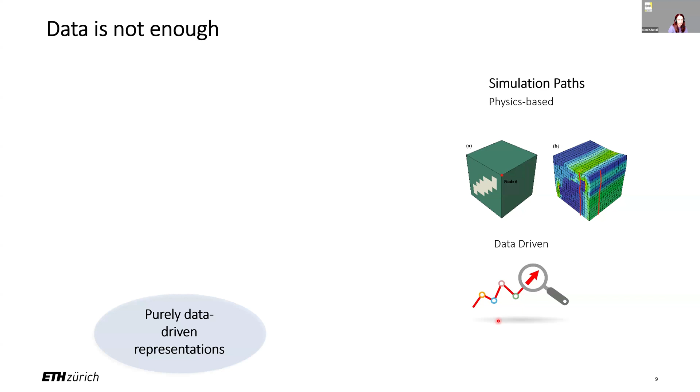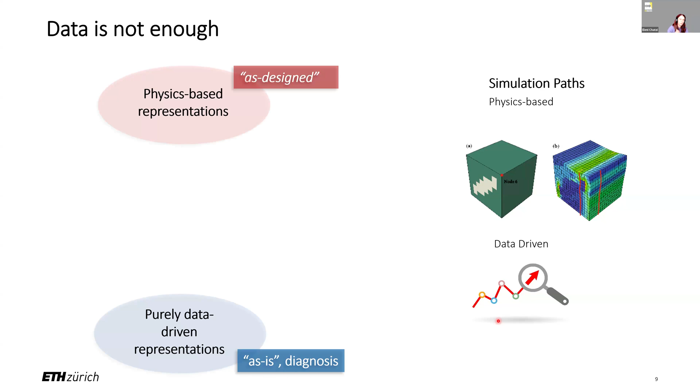We know that purely data-driven representations can give us insights. Actually, oftentimes they excel at tasks that have to do with diagnostics, for example. But the moment you want to go a step further, you have to bring physics and overall understanding into the loop. And this is not new for engineers. We have been using physics for years, but usually we use it in what we call the as-designed system. You use it to design the system and predict and anticipate its behavior, not necessarily connecting this with data.

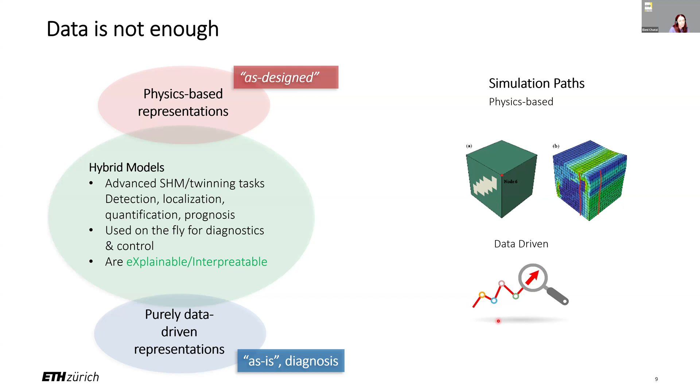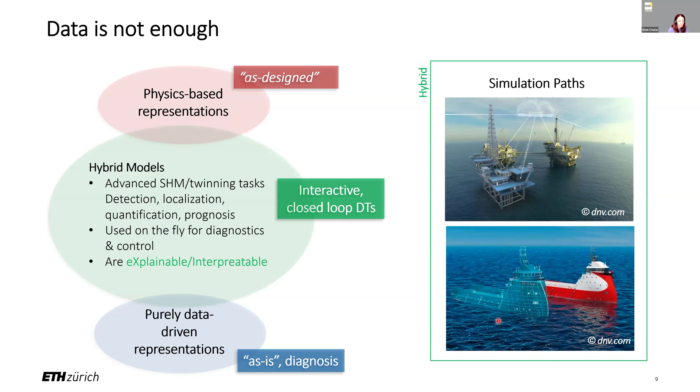And what we would like to achieve here within the context I am describing is the hybrid functionality, the situation where physics and data come together in a hybrid construct, which is, if possible, able to compute very fast on the fly as data is attained, creating interactive closed loop digital twin representations that can really reflect the system as is operating and therefore advise us on how to best react next in a short or long-term horizon.

If you would like to express this problem in the context that we're facing, then we have to admit that it is actually a quite complex problem, especially if we're thinking about real-time digital twinning, which is really the main goal for our activities here at the chair. Since we have systems that are complex in nature, in that they're actually characterized by nonlinear dynamics, they are responding to loads that could be environments that are varying, that are not easy to monitor. They have acting loads such as waves, wind, or traffic that is distributed in nature, not easy to track in a very accurate manner.

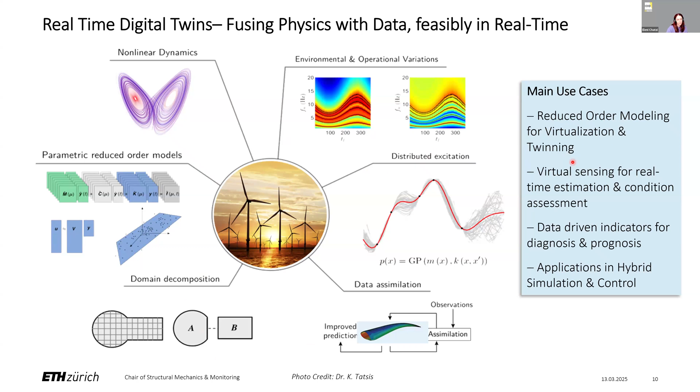And we're gathering data, but this data is sparse, and it is in select locations that we have the ability to instrument. And at the same time, we have to balance this data with engineering models that are usually overly complex and not easy to reduce in terms of computation. So this is what we will try to do here. And I'll try to show you examples that try to achieve this for the tasks of digital twinning and reduced order modeling, data-driven diagnostics and prognosis, but even tasks that really require very fast reactions, such as, for example, control and eventually decision support.

Now, maybe before I proceed, it's good to say that together with some of my colleagues in a recent paper, which you now find available in the ASCE-ASME Journal of Risk and Uncertainty in Engineering Systems, you will find that we try to actually frame these various uncertainties that are underlying the behavior of these systems and try to break it down to the usual construct of how we describe these dynamic systems, because the systems we deal with are usually dynamic in nature. This is where we think most rich information can come from.

So here we try to break the uncertainty into the parts of the problem, from the input uncertainty to the model uncertainty that could be about modeling error, but also parameter uncertainty when some specific prior knowledge of the model is at hand.

Confounding influences or aging processes that are actually acting onto the system, making it harder for us to model its behavior, but also uncertainties that have to do with the measured output, which can never be precisely measured. And you will see different methods that we actually describe for tackling these.

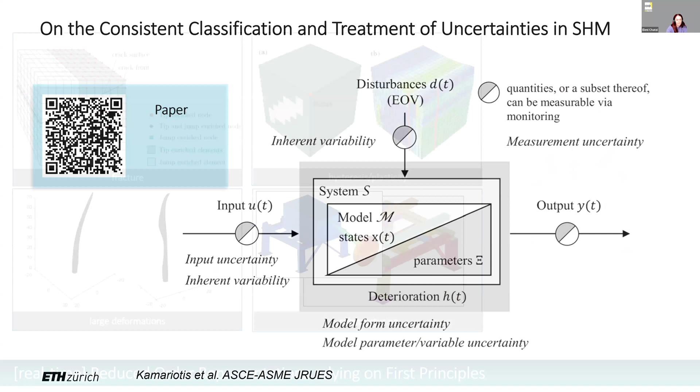Now, given this kind of problem statement, which is quite complex, I want to come back to the actual utilization of the physics. And I remind you that the goal is to use engineering models, but that actually the classical models that we as engineers tend to use are not necessarily the right models, because their complexity often makes them inadequate for the fusion with data. I give you examples of such models because, of course, as a chair and a group, we teach also these methods for fundamental engineering problems.

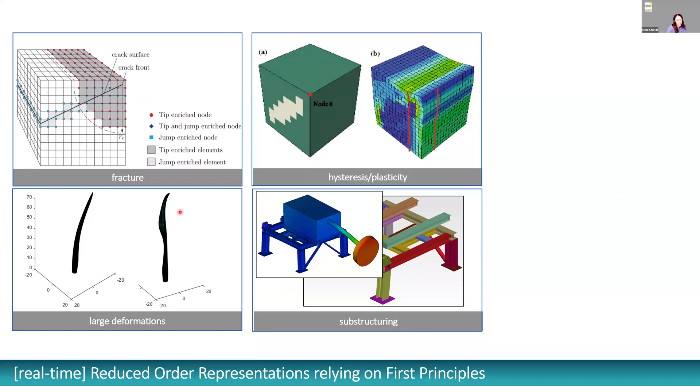But I remind you that actually what we would like to have in the end is something that can compute in fragments of a second for the types of problems that we're dealing with. And I'll show you some examples also later on, but you wish to have simulations of complex, maybe cracked and defect geometries that are dynamic in nature and really, really fast to compute.

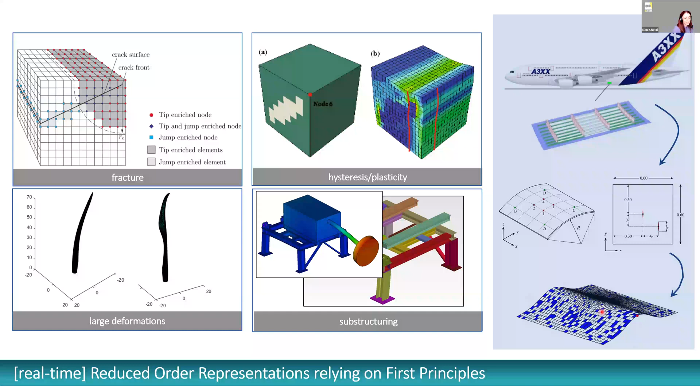There exist today different ways, of course, of doing this. All of you are familiar, I think, with reduced order modeling strategies, or what we typically call surrogates or metamodels. Now, in our context, the most useful of these surrogates are those who can always have or refurbish a connection to the original full order model. And I show you what I mean here with an example by the work of Tom Simpson.

Here I'm showing you the example of a possibly detailed finite element model of a large number of degrees of freedom, which we use for dynamic analysis. And the logic which we can follow for reduction is the following: not to use the original set of degrees of freedom, but to try to reduce these by using appropriate latent space representations. Sometimes for linear systems, for example, you would know this as the modal representation of the system. Now, because we're discussing nonlinear systems, we have to use alternate methods to derive these features.

And here we use a variational autoencoder, which allows us to extract a low-dimensional space where we implement the acting loads to the system. And this is where we're actually implementing also the integration of the system in time. This can be done with your favorite integrator. In this case, we use also a machine learning algorithm to do the integration, an LSTM in this particular case.

Now, what is important in this kind of surrogate framework is that at any point in time, and even though this is a nonlinear system, we can go back to the original space using the decoder function of our autoencoder construct. And this allows us to recover the response of the system in the original full order degrees of freedom. The reason why for us this is important is because the quantities that we measure, whether these are strains or displacements, velocities or accelerations, are in the original degrees of freedom and not in this reduced space. You can imagine it as a modal space, which doesn't necessarily have a physics connotation. So we need this kind of a framework to be able to proceed.

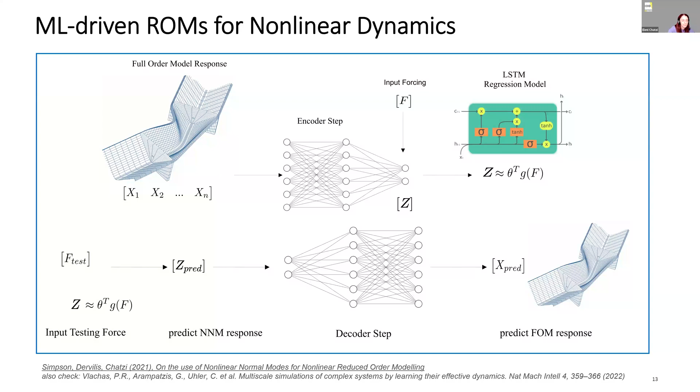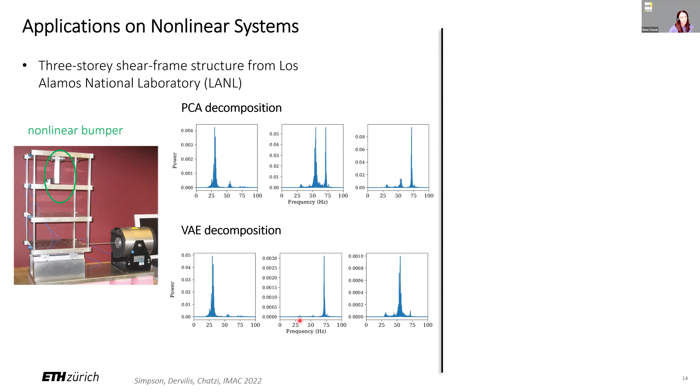We have actually corroborated this framework in the by now quite well-known benchmark of the nonlinear frame of the Los Alamos National Laboratory. It is a frame featuring a bumper, a nonlinear element. And here it is quite hard to show that you can get a good feature extraction, meaning a reduced space where the components are somehow independent, which is the goal, to produce what we would call an approximation of nonlinear normal modes. And we show that with the variational autoencoder, it is in fact possible to succeed in such monochromatic, almost monochromatic and thus individual components.

More importantly for us, we took this developed reduced order model and we implemented it on an actual engineering problem offered to us by our collaborators in Siemens Gamesa, a monopile wind turbine structure, which is actually based on a soil foundation, which has a nonlinear behavior, characterized by the so-called PY curves.

And this kind of computational model is actually very difficult to compute for transient and steady state effects for nonlinear analysis that are of dynamic nature. So we try to implement this kind of approach to give them a surrogate that can produce the same result in all degrees of freedom of the model, therefore including the degrees of freedom of interest, but at fractions of the computational time, in fact, in real time of computation.

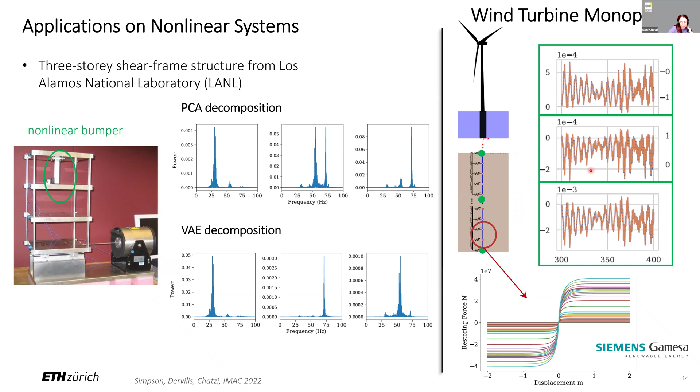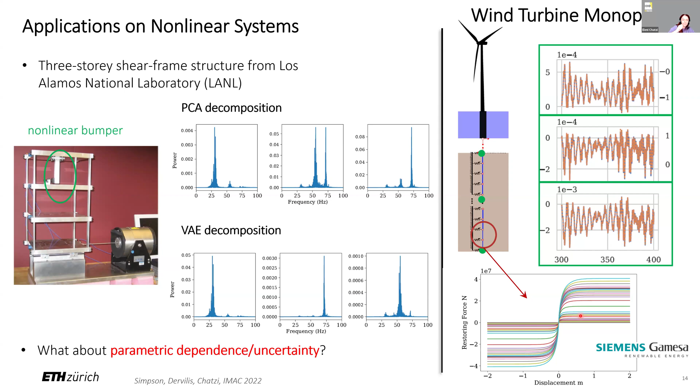Now, in what I've shown you, I make the point of reduction, but I don't discuss something quite important, which is what happens when you want to produce these surrogate models, not only for a single instance of the system, but for various different parameters of the system. For example, what if I had different soil conditions? Can I produce a reduced order model that is thoroughly comprehensive and can also be conditioned on these different various parameters? And the answer is yes, there exist ways to do that.

And one of the favorite ways in which we try to implement this is by producing what are called projection-based reduced order models. I show you here a way in which this is achieved by using a benchmark structure from civil engineering. This is, let's say, a popular favorite, a shear frame structure, which is excited by earthquake. It is also a nonlinear structure because every joint here on the shear frame is a hysteretic joint, meaning it has nonlinear behavior post-yield. It is characterized by a Bouc-Wen hysteretic model, which is a convenient model for us to deploy for finite element approximations.

And it is excited by ground motion, which can be characterized in terms of parameters, both in the frequency and the time domain. So we can actually break down an earthquake excitation into its parameters, which will be defining our problem. And we also have a characterization of the system by a set of parameters that correspond to its linear behavior, for example, the Young's modulus, or its nonlinear behavior, for example, the Bouc-Wen model characteristics.

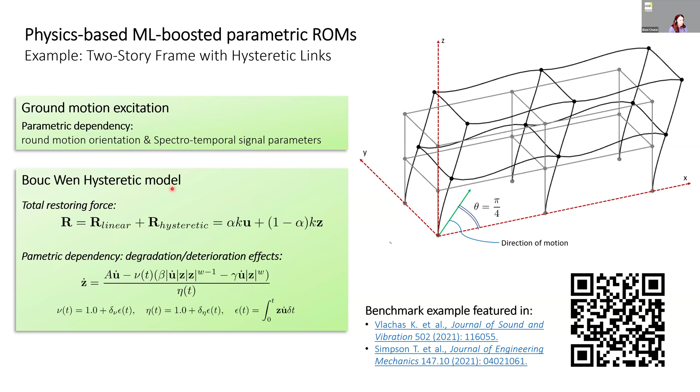So here's the question: how do I produce a fast computing surrogate, a reduced order model that respects the physics, can reproduce the response densely at every degree of freedom, and condition it on these parameters? The way to do it is to use a projection-based approach where your original equations of the problem can actually be transformed into similar nonlinear finite element equations, but now using a new variable, which is of much lesser dimension, of a dimension r, that is much lower than the original n degrees of freedom.

The way this can be achieved is through a transformation of the original variable by using a projection matrix to a reduced space. And this projection matrix is something that we can extract from running multiple simulations of the original full order model. So we take the time histories, we implement essentially a singular value decomposition conditioned on different parameters, and we're able to extract these projection bases.

Now, traditionally, for this extraction to be efficient, you should be repeating it for different types of parameters of the input or of the characteristics of the structure. You could produce such a global basis, but it wouldn't work so efficiently. And there is a problem here in this construct because it doesn't really give us a functional dependence between parameters and these very important bases. And we actually corrected this.

We have introduced with Kostas Vlachas a procedure to reproduce these kinds of reduction bases just by defining the set of the parameters that are governing the problem, and we are able to do it in a stochastic way, which is achieved through the use of a conditional variational autoencoder once more. Given the parameters of the problem xi, we're able to retrieve the local basis of our projection and get very successfully a reduced order model that is very efficient in the way it approximates the problem.

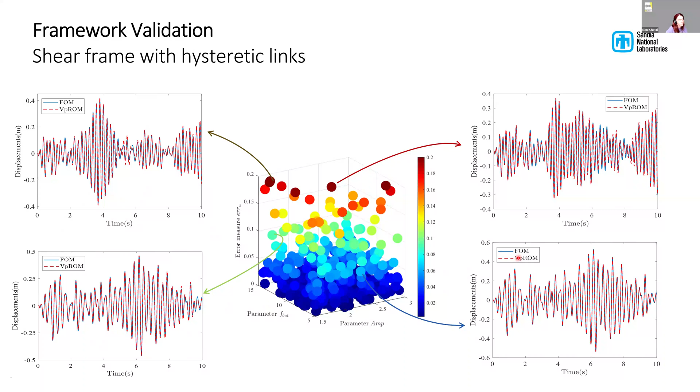And this is something you need to know when you're using a surrogate. A surrogate is an approximation. A reduced order model is an approximation. So what is important for us as engineers is to define the threshold where we accept a possible error, which is what we did here. And you see that we get a sufficient approximation of the quantities of interest that are the dynamic response time histories at different degrees of freedom of the system.

Because we're using an approach for a reduction that employs the variational autoencoder for producing the basis, we also have a stochastic tool that can give us some uncertainty bounds about what is the error associated with our approximation. And this is what you see here. So we don't just have a deterministic estimate, but also a way to quantify the probable error that is induced from this approximation, this reduction of the full order model.

Up until this point, I have discussed how to reduce models so that they can be used with data, and now we'll also give you a brief overview on how we can fuse these models with data, which in our group, again, we claim can be done in various ways, depending on the confidence that you can attribute to physics, which is your model. So if you have strong confidence, you can even use a white box, a perfect model. Or if you don't have strong confidence, you have to rely more on data. So you could use a black box model in the worst case when you have no knowledge of the physics.

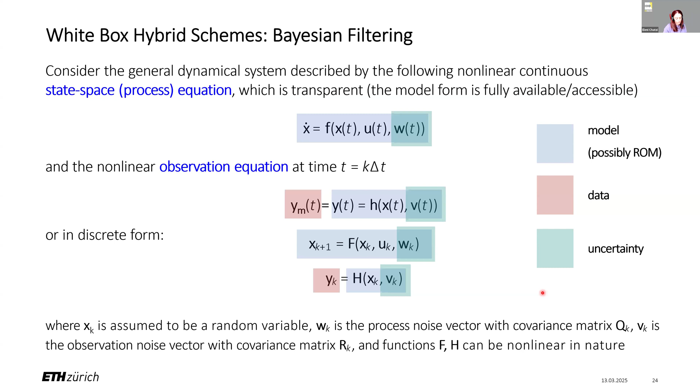What we can do is to exploit this kind of dynamic model in a Bayesian construct. And this is what we will do here. We will use our models in a Bayesian filtering context. And this is how this works. In Bayesian filtering, we assume that the response of the system, which is our state, is a stochastic variable that can be approximated for nonlinear problems by a set of discrete points that are actually capturing the mean and variance of our response. The state is usually the displacement and velocity, for example.

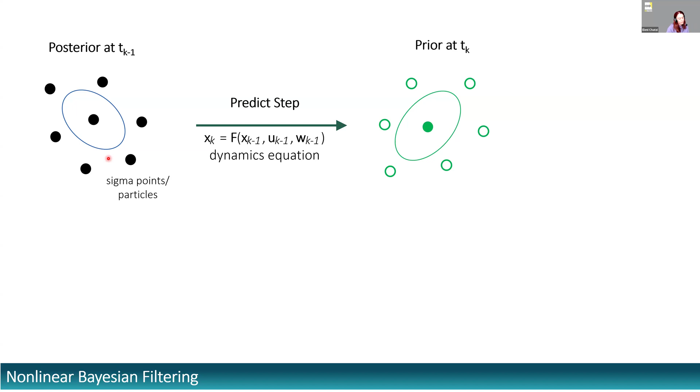If this is how we approximate the state at time t k minus 1, we then pass it through the equations of the problem, the reduced order model in our case, to get the response of the system or an estimate of that response at the next point in time by propagating these points through the nonlinear function and then getting their statistics. Now, additional to that, we also have the benefit of monitoring.

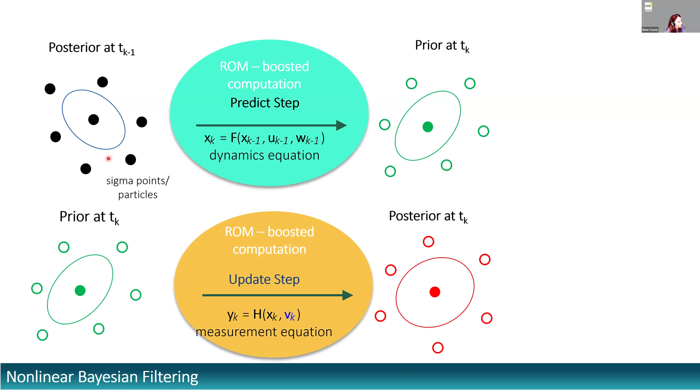So here we can use data, understand by getting the estimate of our measured quantities how far our prediction is from the truth, and correct for that discrepancy to get an optimized posterior, optimized in the Bayesian sense, that tries to bring a balance between the model of the system, the reduced order model again in our case, and the data and measurements that we have been collecting. So it's always about this sort of exercise in balance, how much of the physics and how much of the data contributes to our estimate of the response.

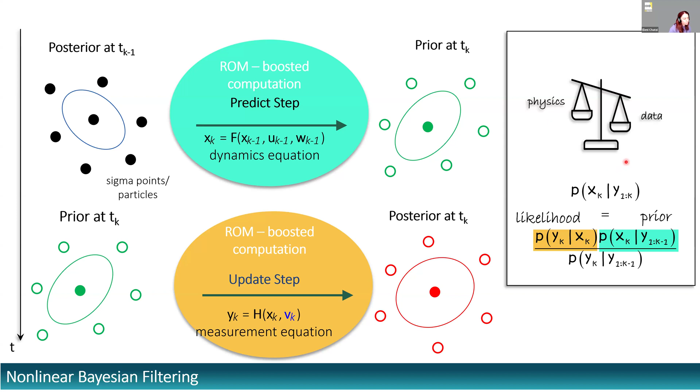This is the rough description of the framework. There is a lot more math that goes into this, which you can find in our recent publication, where we overview different methods for extracting just an updated estimate of the response of the system.

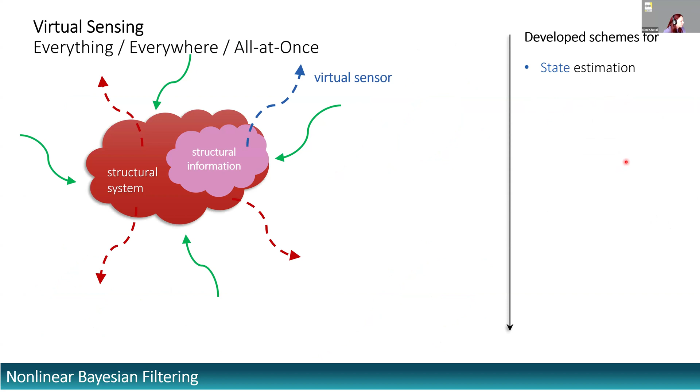When the system has unknown parameters in its description, you can also estimate these parameters in a joint state parameter context. If the input to the system is unknown, there is also a way to estimate the input to the system, provided you have appropriate observations, or you can try to do everything everywhere all at once, input, state, and parameter estimation, which is again possible provided that the laws or the conditions of observability, identifiability, and invertibility are respected.

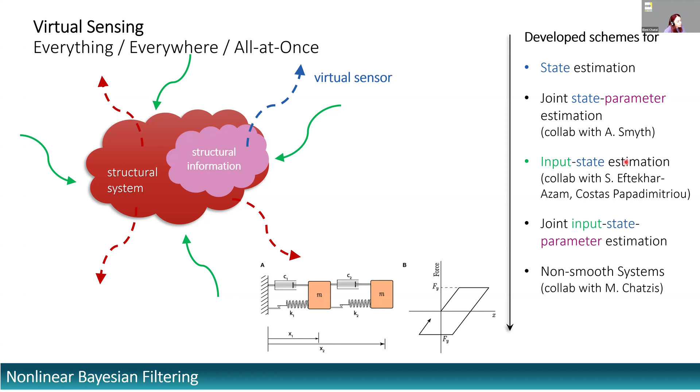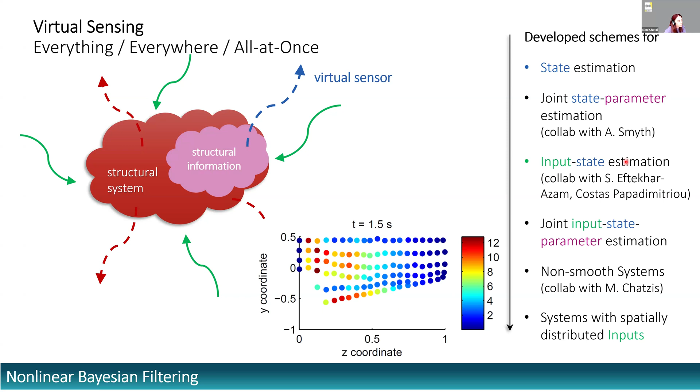We have produced different types of versions of these algorithms, even for challenging problems like non-smooth problems or problems with distributed inputs and parameters, for example. And you will find them in this recent tutorial paper, which is completely open access and comes together with a code, a library in Python that explains how to use different types of Bayesian filters depending on the task that you wish to achieve. However, a big assumption in this kind of framework was that the model was quite well formulated. The model error, therefore, is quite low.

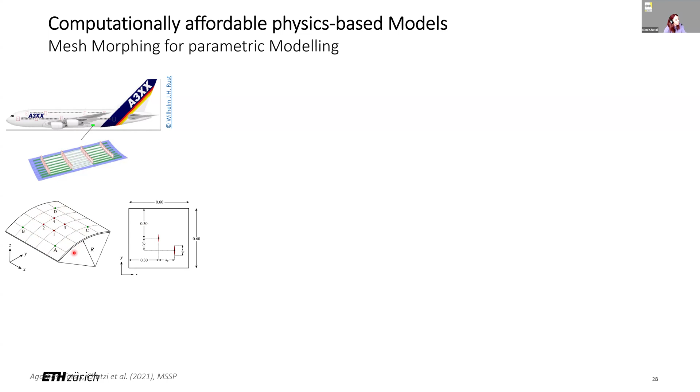Let me show you here an example on an application. This is the case where we try to approximate the behavior of the fuselage, which is a shell structure, which we assume could have different types of damages in the form of cracks. And we try to monitor this by using a limited set of sensors here in red. And we're also trying to deliver a digital twin, so we want to predict the response of the system also in the green locations, which are not observed.

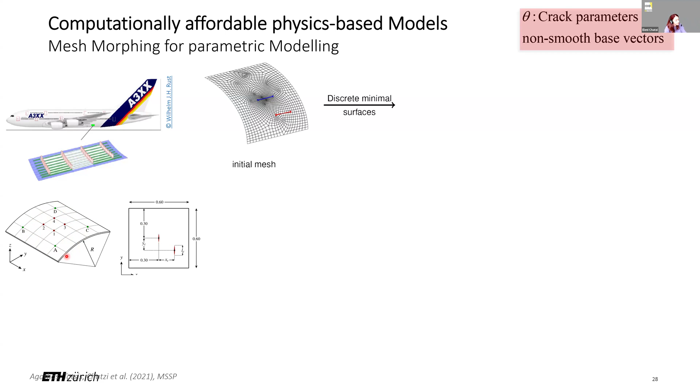So I'll treat this as a reduced order modeling problem, but the parameters now are the possible positions of the crack. This makes it a non-smooth problem. In order to solve this problem, you have to bring in again your engineering intuition. We use a trick from computational mechanics, which is mesh morphing, to use a fixed number of degrees of freedom, but morph the mesh even for curved geometries so that we can represent different types of cracks in different positions and orientations within our original geometry.

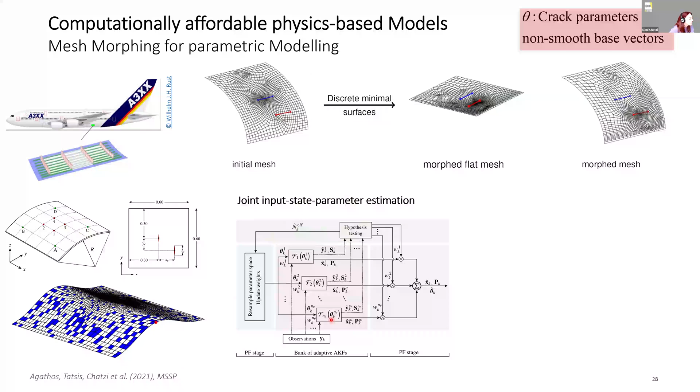By doing this, we're able to then use the reduced order model, which computes very fast, put it inside a Bayesian filter estimation that assumes that the inputs are unknown and treats them stochastically, but also the parameters are unknown and should be estimated. We formulate a sort of nested optimization type of loop, and we're able in the end to extract estimates both for the parameters, the location, orientation, and placement of the crack as the analysis proceeds, but also, more importantly for us, perhaps, we're able to reproduce the response of the system in virtual sensing positions, in positions that are not being measured, with quite high accuracy.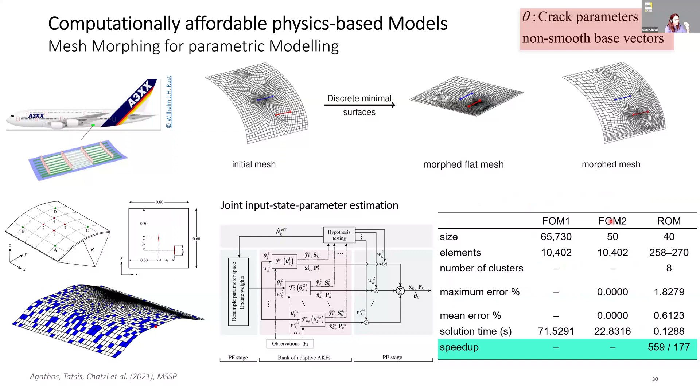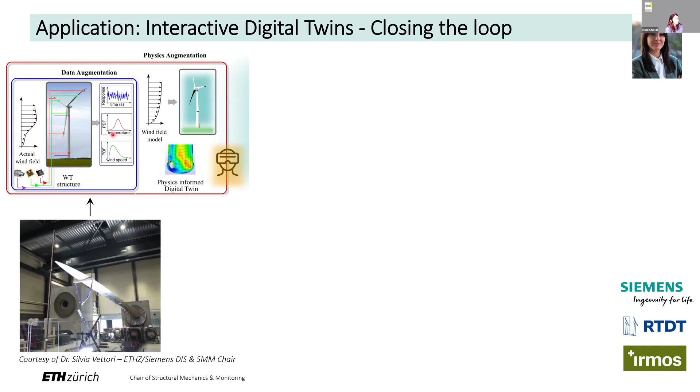And what she did was to use a model of the system that is a reduced order model. She used substructuring for that, for the blade model. And she used a Bayesian filter, an augmented Kalman filter in her case, to combine the data from the sensors with the model predictions to deliver a surrogate that can actually then feed visualization tools that are not produced by us, but by Siemens Industry Software in this case, where Silvia was also a member.

But you can see here the sort of augmented reality logic, which brings the very fast prediction of such a surrogate to the laptop of an engineer so that they can then have a full field estimate of the strain on this blade, so that they can then proceed with any desired downstream task, whether this is diagnosis of damage at the current stage or even reliability indicators about the fatigue accumulation given new loads, and understand robustness of the system, reconfigurability, and all of the aspects of resilience.

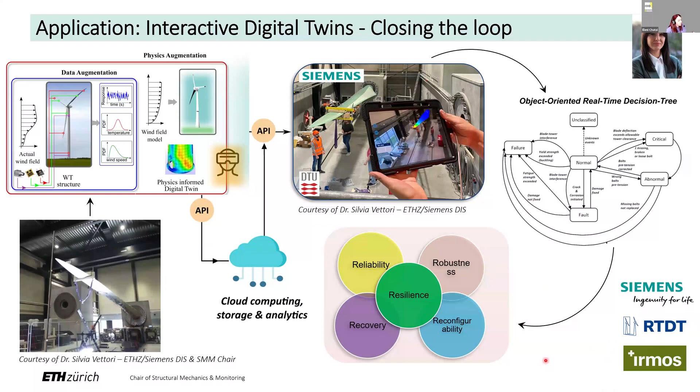For us, it is very important to deliver such frameworks that are motivated by real-world situations, and this is also the case for two spin-offs of our group, RTDT Laboratories AG and IRMOS Technologies, that are now implementing these concepts on wind energy and transport infrastructure assets.

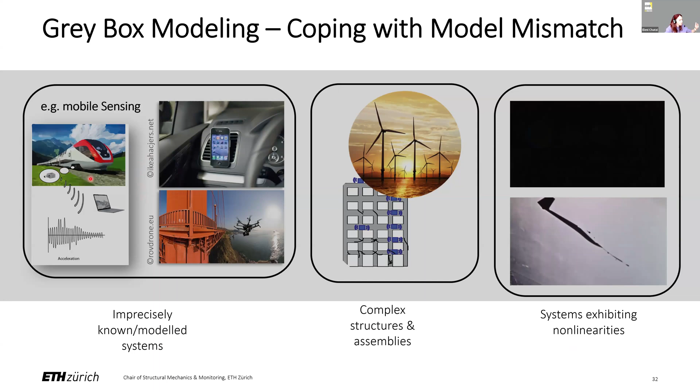What I failed to explain, though, earlier, but I sort of left it for later, is the more intricate complexity. So what if I don't have a model that is very well able to represent the behavior of the system? Maybe I have errors that are bigger in the form of what we would call model mismatch or model form error, because we have phenomena that cannot easily be modeled by physics-based terms, because we have systems that are being, for example, largely traversed by our sensors, and we cannot actually anticipate to have their detailed model. What happens in that case?

In that case, you have to start going down the diagonal of the previous spectrum, and you have to trust data more and more into your simulation without, however, abandoning the physics. This is what we explain in a recent paper on physics-enhanced machine learning, where we explain the aspects of navigating the spectrum depending on the balance you wish to keep between physics and data. And there you will find both the paper, but also the code, again in Python, offering different types of implementations for basic algorithms that we have experimented with.

You also will find some of the algorithms that we have developed as part of this effort, which you see summarized here, and which we could cluster in terms of the way in which they impose the physics into physics-guided, physics-encoded, and physics-informed schemes. All of them we cluster under the prism of physics-enhanced machine learning, with the difference being the following. In physics-guided schemes, we try to put the equations of the physics explicitly into the transition and emission functions of the neural network architectures that we use.

In physics-encoded schemes, the architecture of the neural network itself is made to be a differentiator or an integrator that respects physics, such as Hamiltonian principles. So the architecture encodes the physics in a way. Or you may have physics-informed schemes which more loosely implement the physics just by having it as a loss function where you express your desired equations that have to be satisfied and the desired constraints. All of these bring different flavors into the approximation, and they depend on the problem which you have at hand.

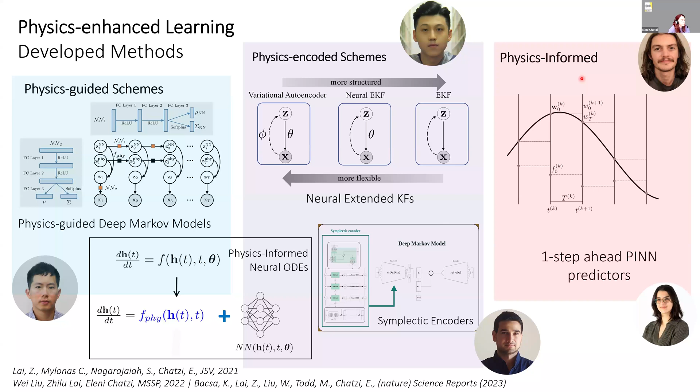One of the favorite ways in which we try to do this kind of mixing is with this physics-guided approach. We love to be able to feed the equations explicitly into the formulation whenever this is possible. And you can imagine this, although it is not necessary to see it as so, as a superposition. So imagine you have a system for which some physics is available, a simple model, even an empirical model, and where also some data becomes available. It is possible to create a construct that uses part of the physics and complements it with learning a model from the data, for example, a model of the discrepancy, so that you can best approximate this system.

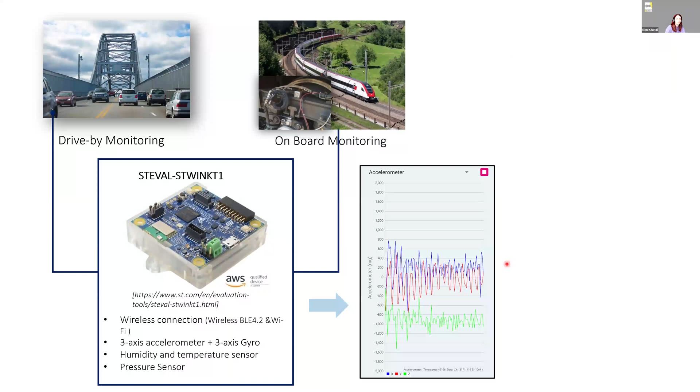I already referenced this example where we use sensors on trains or cars, so different vehicles, to collect information on the basis of vibration and to indirectly in this way monitor the traversed infrastructure. We do this both with collaborators in Singapore and in Switzerland. And here is that principle.

You have a rudimentary model of the vehicle, which actually is not precise, and you try to learn the rest, the model error perhaps, through the data that you collect. By doing this on different types of surfaces, in the beginning on flat surfaces that do not, for example, have roughness, you're able to get an updated model of the system, which can then be used to understand, for example, inputs to this system, as is, for instance, the roughness of the roadway pavement.

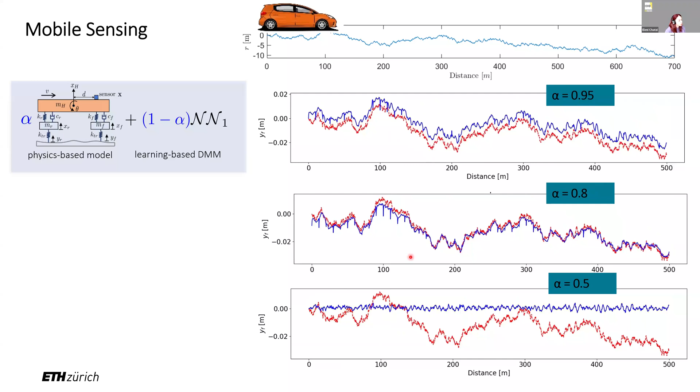And this is for us a quantity of interest when we do mobile sensing. We want to recover this roughness because it's an indicator of the performance of the road and the way it has been constructed. We show that by using this physics-guided model and having different weights to fuse the physics and the data, you can have different levels of approximation. The optimal approximation is actually learned by the algorithm. I'm just here forcing the different levels to show you that there exists such an optimum balance.

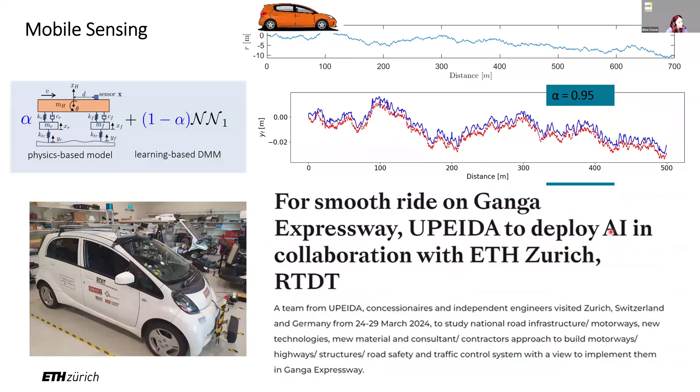Now, there is a part I wanted to squeeze in here, but I think we don't have enough time for this, and therefore I will only briefly refer to this, which is what happens if you want to discover meaningful representations of the physics that the neural network fits. And this is possible. We show it for a use case of an experiment here of a nonlinear shear frame outfitted with a negative stiffness damper, which is a nonlinear mechanism.

Here we claimed we knew only the linear behavior of the system, and we tried to recover the behavior of the damper through the neural network, which we do, but then it's approximated by a black box model in a sense. If you want to transparentize, as we would call it, decipher this learned neural network, it is possible. And you can do it by trying to fit grammar-based expressions that try to approximate the learned equations. There exists a very well-known tool for doing this in nonlinear dynamics, which is SINDy.

And indeed, we tried this for this example, showing that yes, you can recover an approximation that sort of gives you an equation of how this damper behaves, but we tried to then also improve this tool because when you use such dictionaries, it can be quite restrictive. You really have to specify the terms that you believe are feasible to describe the problem. We want it to be a bit more loose, more flexible.

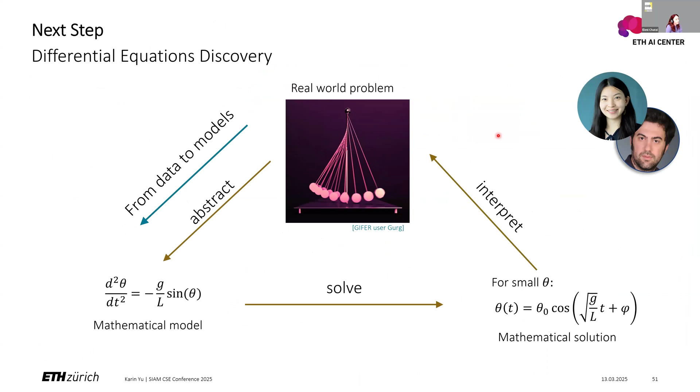And in this recent paper with colleagues at ETH Zürich, the paper is led by George Kissas, we show how to use formal grammars, which are tree constructs with symbolic expressions, to fit inverse problems, such as, for example, the discovery of constitutive laws, of material laws from dense observations that could be DIC measurements, for example. I don't have the time to go over this, so I will skip this portion, but I would like to tell you that we're now extending it for approximating also differential equations, so not just constitutive laws, in work that you will see coming up soon from Karin Yu and George Kissas.

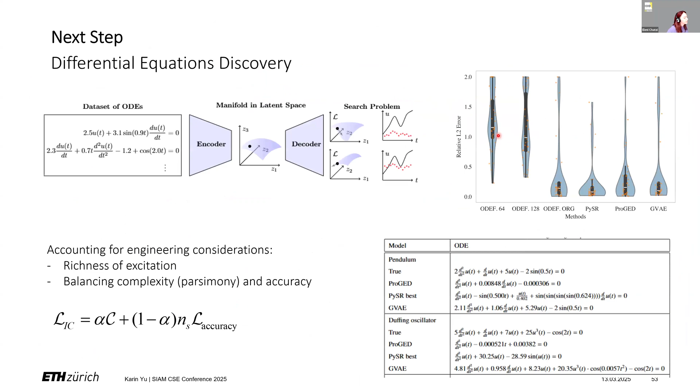And finally, I want to close with what we think you can do next with these methods that we try to develop. And what we think you can do next is try and assess at the system level, at the network level. So you can take these principles of using these usually low-cost sensors with diverse information, such as, for example, acceleration and GPS.

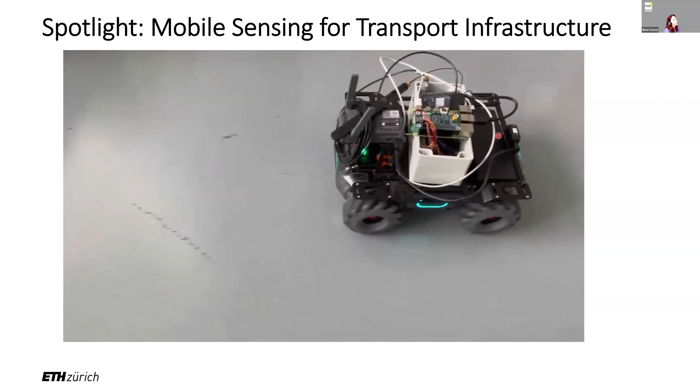In our case, we have outfitted these on movable platforms that don't need to be vehicles. In fact, we have done this also on robotic vehicles of a very small scale, such as the one that you see here. It's the so-called RoboMaster. We use this simple vehicle to traverse the shoulders of bridges and extract information about their behavior, about their dynamics.

We use these kinds of sensors on bicycles, and we ask volunteers to use them to traverse bicycle pathways so that we can extract information on the roughness of the pathways, possible defects, and holes that are somehow compromising the condition of these assets. And then we try to map them at the network level. This is sort of the principle we wish to follow.

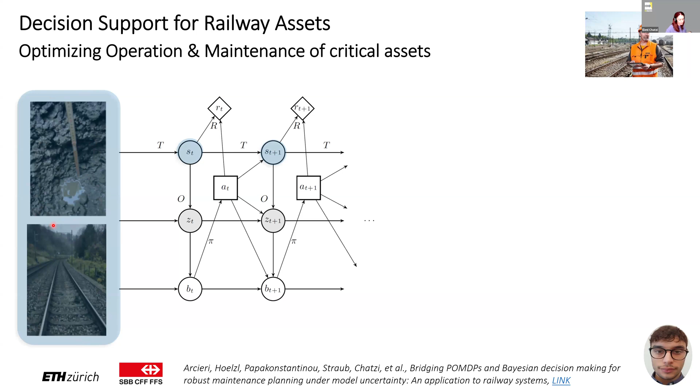This is the principle we follow also with our assessment of railway infrastructure with Giacomo Arcieri. We're using indicators that come from diagnostic vehicles of trains that offer information about the situation of the rails and the subsoil, the ballast. And based on this monitoring information, we have collected 10 years of such observations from the diagnostic vehicle. We're building a model of the system, a model of its deterioration. It's a stochastic model. It's a partially observable Markov decision process because our observations are incomplete and indirect.

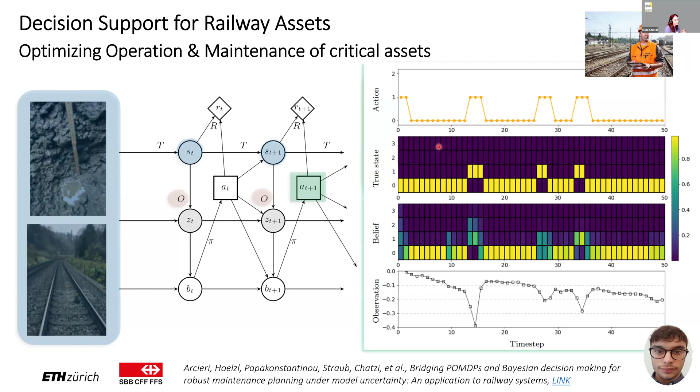And together with information from the experts about the cost of intervention strategies and how they impacted the system in our observed data from the past, we're able to build strategies on how to best manage these assets given observations in the next years to come.

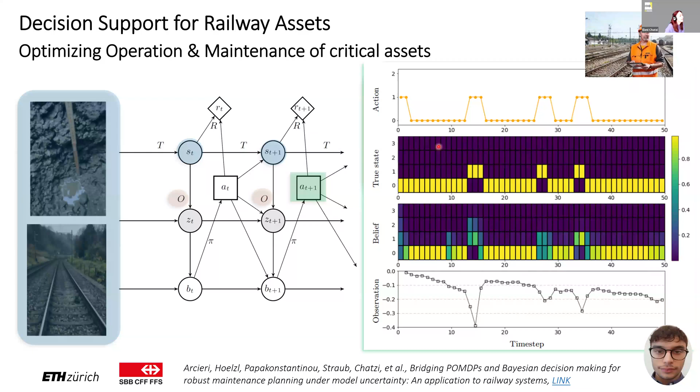So you have now the new inspection information from the diagnostic vehicle, how to use it, what would be the best way to use it to minimize your expected costs for maintenance in the next foreseeable future or the horizon that is of interest. This is an optimization problem that can be solved mathematically and is explained in the recent works of Giacomo. I don't want to give you more details because I sort of extended my time.

I just want to close with this kind of a vision slide that explains the process that we follow from collection of data to augmentation with physics intuition and engineering knowledge and the corresponding models, with interaction and information from the experts about how the system performs and what are the costs that are associated with different types of actions, to best understand how to deliver predictive tools at the level of the ecosystem, which is the network level.

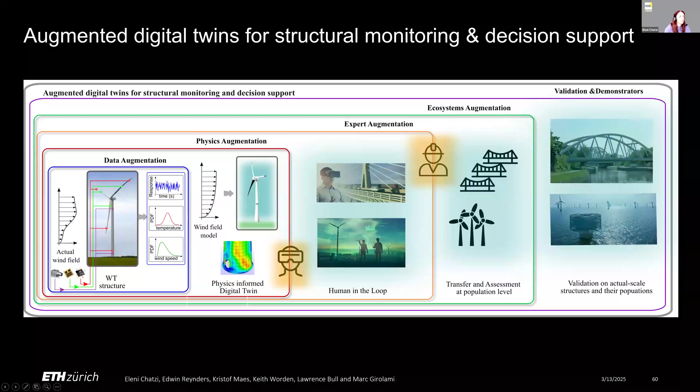We have a first question from Anshu Sharma. He says, good morning. I have recently started my research in the area of physics-informed neural networks for structural health monitoring. I'd love to hear some advice to move in this area.

Yes, so our experience with physics-informed neural networks is that it is a very potent tool for solving equations when you have an expression of the equation of the problem and some data, because it can be used to do a balance of the two, but you have to know that it is an instance modeler. The PINN tries to solve the equation of the problem as a finite element model would. The reason why it is of interest is because it tries to do it in the continuous space and not the discrete space of the finite element model.

Oftentimes, and there have been papers that show this, the PINN can be very slow, actually sometimes slower than your FEM model. But the benefit, therefore, of its use is to use it in an inverse context, in my opinion, to use it to identify parameters because they can also be inferred during the optimization process so that you can have a good balance between the solution of the physics equation, which is in the loss, and the data that has to be respected that you can also feed into the loss. This is where it's particularly strong.

Now, there are also ways to reduce the computation of a PINN. And one of our recent scholars in the group, Rui Zhang, has delivered such a method that tries to break down, to discretize the domain of the PINN, the time and the space domain to do this.